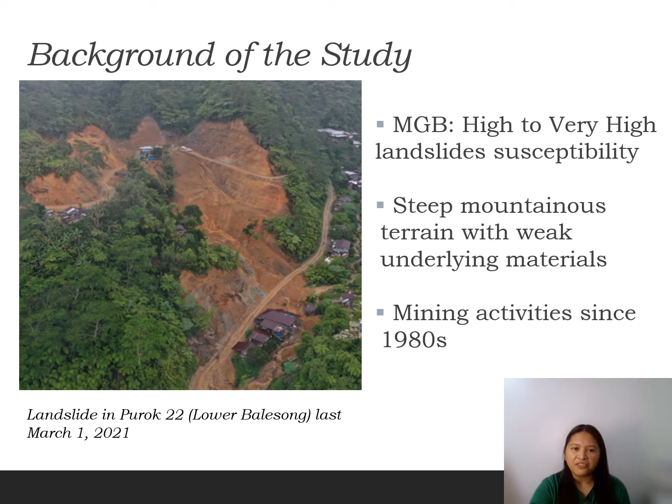Landslides had been a perennial problem in the area, especially during the rainy months of November to March. And of course, rampant mining activities certainly aggravated the situation. Since the early 1980s, people have flocked to the mountain for its high-grade gold ores.

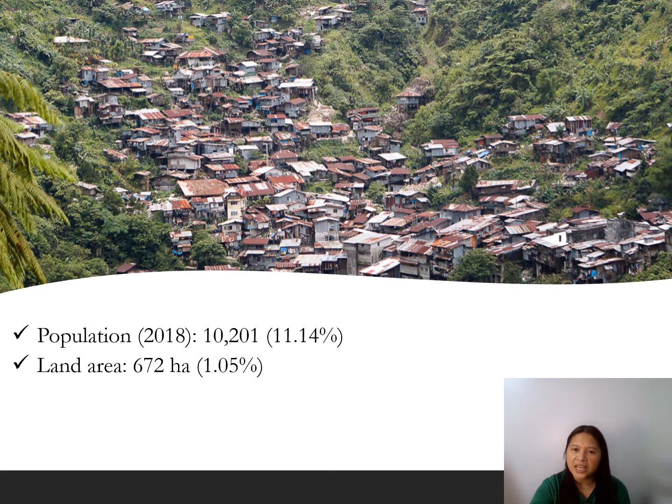Mount Diwata at present is home to approximately 10,000 miners and auxiliary workers and their dependents based on the 2018 census. However, it only covers 672 hectares, or a little over 1% of the total land area of the municipality. So this means that Barangay Mount Diwata has the greatest population density among the barangays of Monkayo.

In spite of the danger in the area, especially during the rainy season, people continue to live and thrive there because they are dependent on the ore-rich mountain for their livelihood. If the local government unit would strictly adhere to the hazard map provided by MGB, the whole area should be uninhabited. However, this would lead to displacement of people from their communities and consequently loss of their source of income. So this is the current dilemma of Mount Diwata.

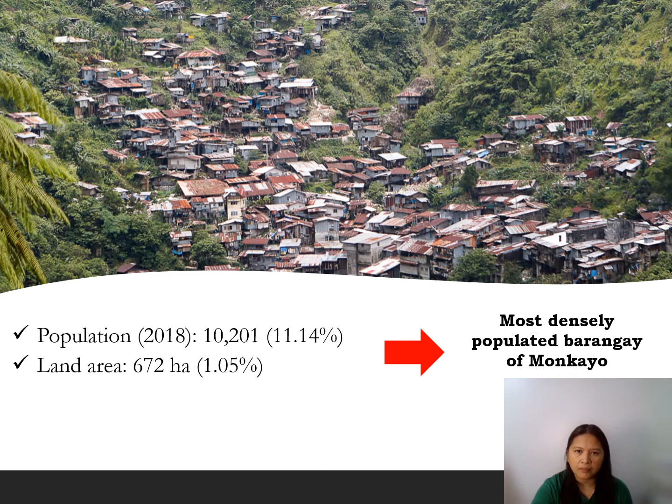Since it would be difficult to relocate people from the area, a better way of addressing the problem is to conduct a detailed geotechnical investigation to identify safe locations for settlements. The current hazard map from MGB has been based only on the geological parameters. Thus, the whole barangay had been identified to have very high or even critical susceptibility to landslides. However, a more detailed study on the soil properties and its strength parameters can delineate specific areas as safe and unsafe zones. So, the objectives of my study are as follows.

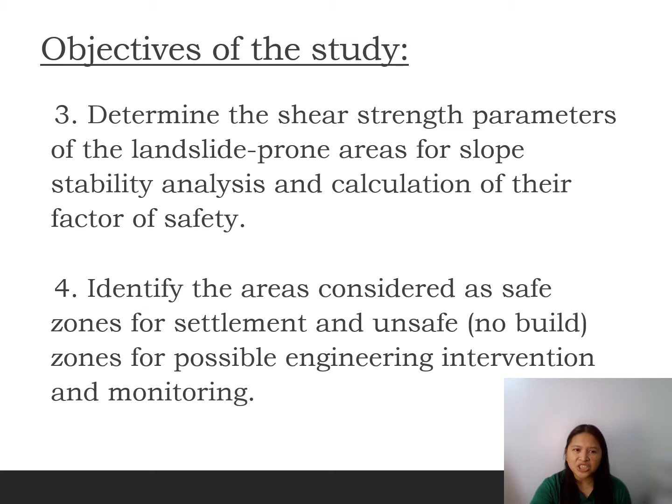First, investigate the physical and mechanical properties of the soil in the landslide-prone areas. Second, assess the geotechnical properties of the soil to evaluate their contribution to sliding. Third, determine the shear strength parameters of the landslide-prone areas for slope stability analysis and calculation of their factor of safety. And fourth, identify the areas considered as safe zones for settlement and unsafe or no-build zones for possible engineering intervention and monitoring.

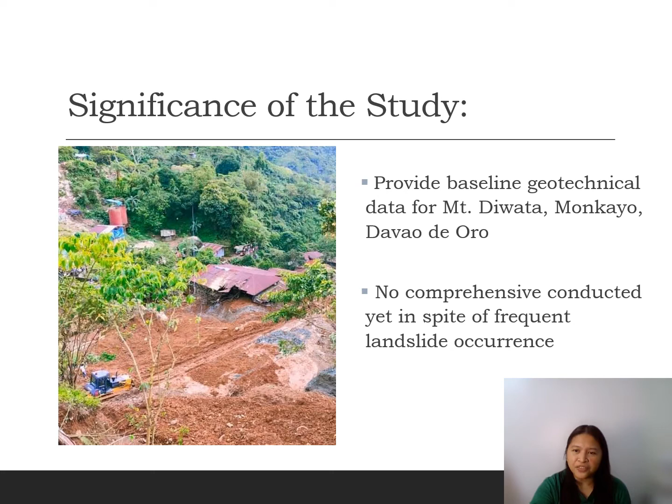Despite the millions of pesos wasted from property damages, plus the significant number of lives lost, there had been no comprehensive study conducted yet on the frequent landslide occurrences in Mount Diwata. The current study will therefore be the first geotechnical study in the area and will provide the baseline data for further studies. Note also that there had been no published information on the landslide hazards for the whole province of Davao de Oro, even though it had been identified as one of the provinces most susceptible to slope failures.

So this geotechnical study conducted for Mount Diwata can also be adapted to other landslide-prone areas in the province since these areas share the common characteristics of mountainous terrain with steep slopes, frequently experiencing heavy and prolonged rains, and the presence of mining activities.

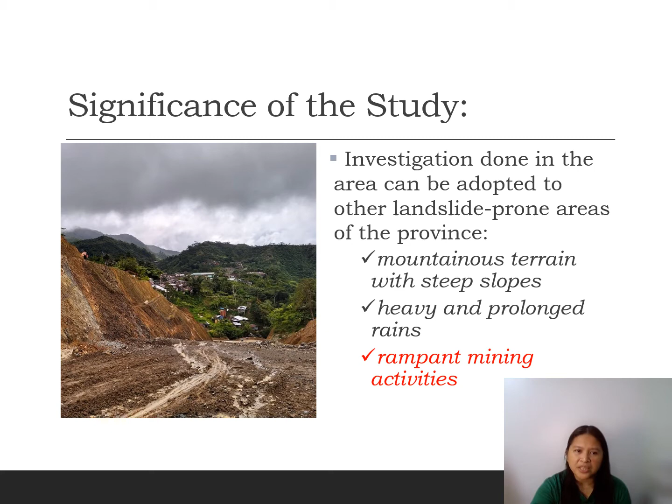So the mechanism of rainfall-triggered landslides often comprises a complex interaction between hydrological and geotechnical processes, which in turn depends on several factors like topography, hydrogeotechnical properties, and the initial state of the slope. The initial state of the slope is determined by its geometry and the initial water table. However, the actual failure conditions are heavily influenced by rainfall characteristics and the properties of the soil slope.

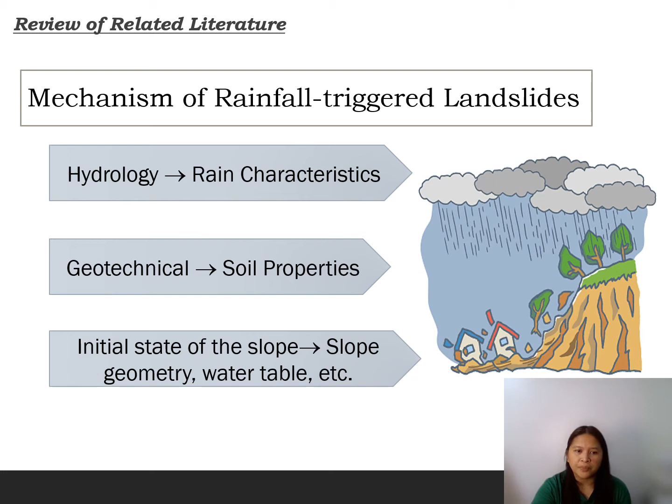Infiltration is a major factor in the instability of slopes during rainy weather. Rainfall infiltration can reduce matric suction, or the tenacity of the soil matrix to hold on to water. So this results in the reduction of the unsaturated soil shear strength along the potential failure surface. When the shear strength is no longer sufficient to maintain the stability of the slope, failure occurs. Pore water pressure and water content in a loose soil slope change rapidly. So water infiltration into cracks in the slope has a great impact on landslide development.

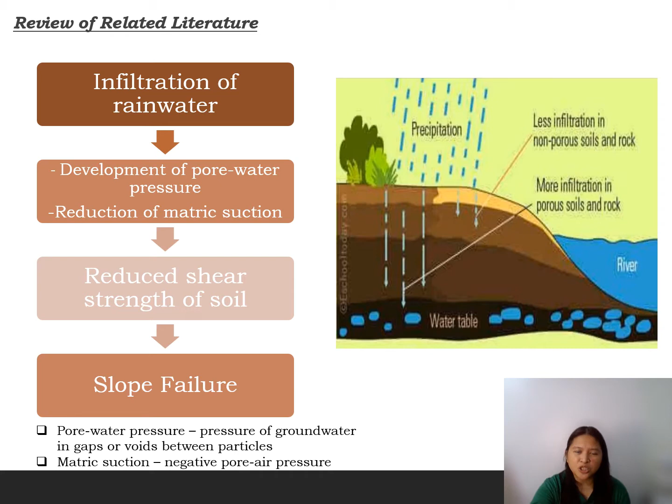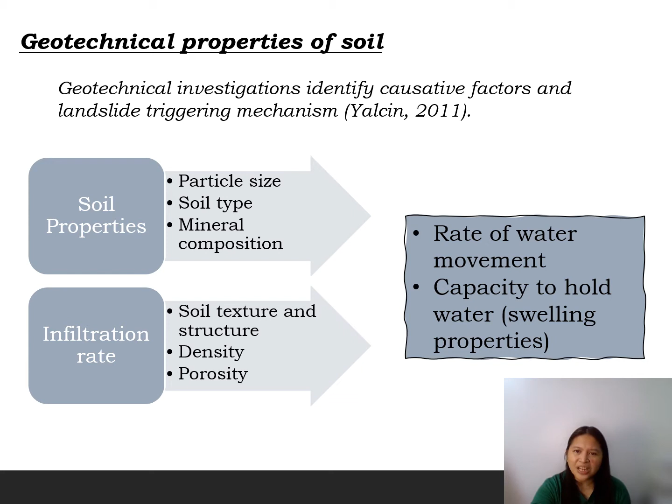Geotechnical investigations are carried out to identify the causative factors and landslide triggering mechanism. Soil properties such as particle size and pore distribution of the soil matrix can influence slope stability. These properties influence the rate of water movement and the capacity of the soil to hold water. Soil texture, structure, particle density, bulk density, and porosity are the properties which correspond to infiltration rates. Highly plastic clays with high to very high swelling and shrinkage potential will always favor landslide occurrences. In the majority of the cases, the failure mechanism is closely related to the type of material in the slides.

The mechanism of loess landslide is associated to progressive weathering along the zones in these slopes, which causes dramatic decrease in strength. The reduction of shear strength is due to the leaching of readily soluble salts, destruction of cementation bonds, and distribution of particles. However, for rock-soil aggregate slope, the deformation and failure mechanism is a progressive process, and local landslides will occur step by step.

The increase in water content decreases its cohesion and friction angle, but this also increases the weight of the upper rock soil aggregate. So the combination of increasing stress and decreasing rock mass material mechanical parameters will result in the toppling failure.

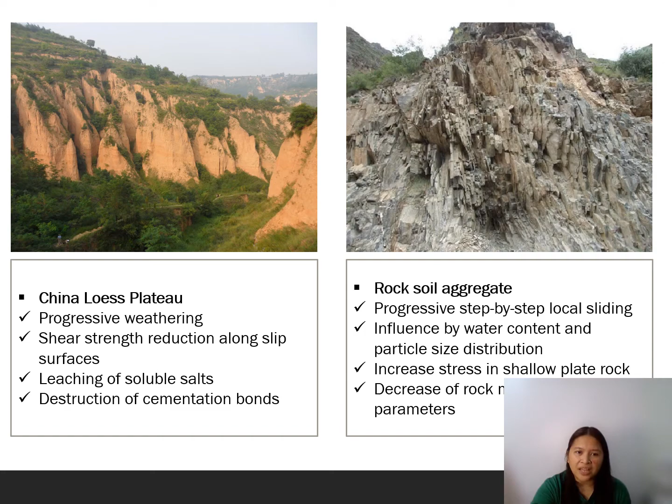Clay, on the other hand, has been characterized by its high swelling potential, sensitivity to humidity, and moisture that it becomes the potential slip zone in an outcrop causing landslide. The abundance of clays in a landslide body has a significant effect on the mechanical properties of the slip zone. The slip zone of a landslide is the natural shear zone resulting from different stress disseminated through different lithologies. Hence, the presence of clay in the hilly region is strongly attributed to landslides.

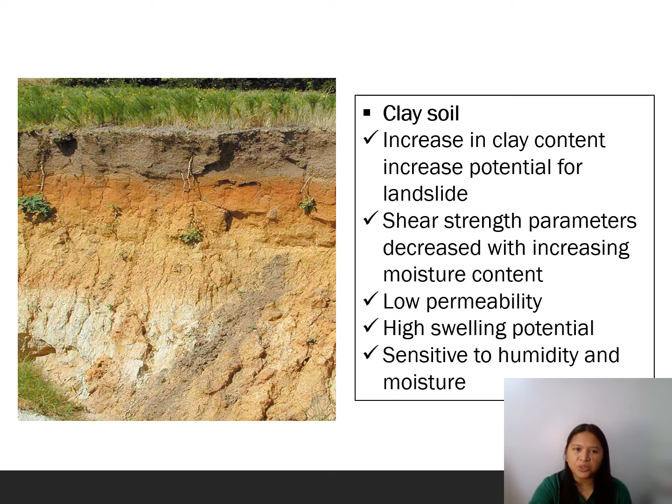For local studies, the failure mechanism of some of the biggest landslides were investigated. The Guinsaugon landslide in Leyte has been well studied as it is considered as one of the largest to have occurred in the recent years as well as the most devastating in terms of loss of life. According to Evans et al., the occurrence and behavior of the disastrous rock slide debris avalanche was determined by the intersection of geological, tectonic, climatic, and cultural factors.

It was initiated by the failure of a 450-meter high rock slope within the damaged zone of the Philippine Fault. The tectonic weakening of the failed rock mass had resulted from active strike-slip movements along the Philippine Fault. In addition, it was further enhanced by undrained loading of rice paddy fields on the valley floor beneath the debris sheet. No direct trigger was identified, but it did follow a period of very heavy rainfall with a lag time of 4 days, and 2 minor earthquakes also occurred on the day of the failure.

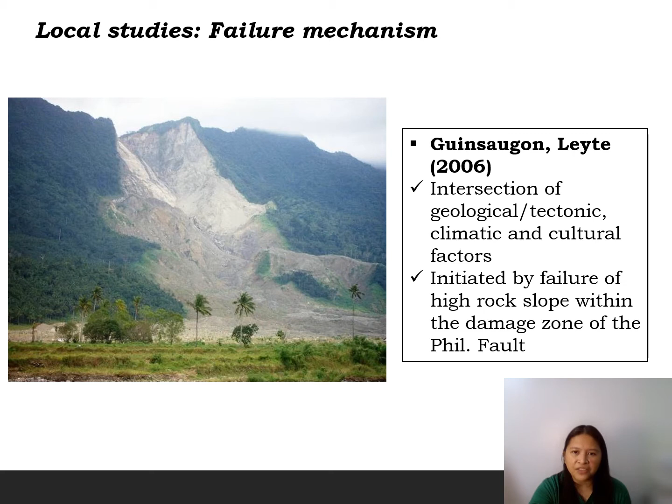For the study of Catane et al., the September 2018 Naga Cebu translational block slide occurred as multiple block detachments along a series of tension cracks that formed and grew progressively prior to the main failure. Preliminary slope stability analysis showed that the slopes were marginally unstable even in dry condition. Though the low angle profile of the slip surface favors stability, the low shear strength of the limestone bedrock and unsupported cut slopes may have contributed to the failure. There was no apparent direct trigger for the landslide, so this implies that a marginally stable slope can stand for several years before failure occurs.

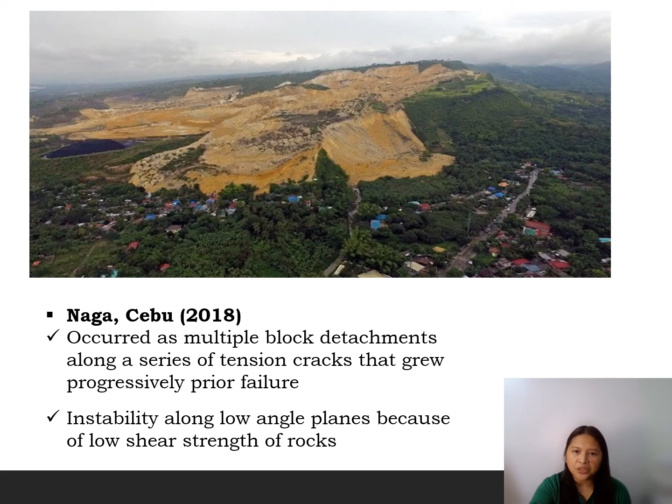Several landslide susceptibility maps on different locations were also made employing statistical analysis to determine the causative factors for the slope failure. Landslide inventories were performed using aerial photographs and satellite images. Dumlao and Victor, applying logistic regression within a GIS environment, showed that almost 40% of Antipolo City is potentially high risk in terms of landslide incidents.

The logistic regression model developed by Cruz et al. for Benguet identified aspect, elevation, and leaf area index as the causative factors which have statistical significance to landslide incidents. Their model also showed that 69% of Benguet is highly susceptible to landslides.

Opiso et al. also used GIS and frequency ratio to evaluate the causal factors of rainfall-induced landslides along the Cagayan de Oro, Bukidnon, Davao City route. Frequent landslides had hampered the flow of transportation in the area. The rainfall-induced landslide susceptibility index map generated showed rainfall coupled with soil type and slopes were the main triggering parameters.

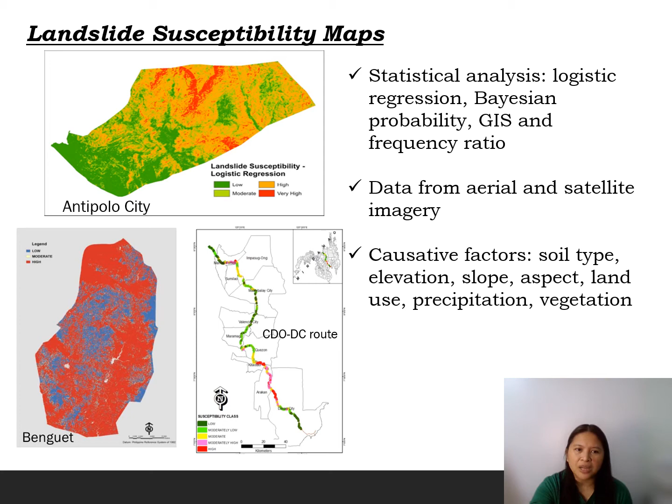The deterministic GIS model, called Stability Index Mapping or SINMAP, was used by Alejandrino et al. to generate a rainfall-induced shallow landslide hazard map for Davao Oriental. SINMAP used a digital terrain model to derive topographic, soil geotechnical, and hydrological parameters to compute for the factor of safety. The landslide susceptibility classification was translated to zoning maps indicating areas that are safe from shallow landslides, areas that can be built upon with slope intervention and monitoring, and the no-build areas.

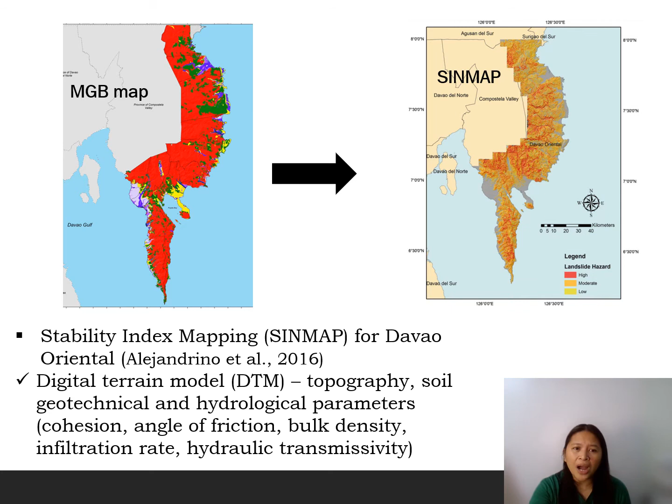So this study showed a great improvement from the MGB released hazard maps, which only utilize geological parameters and usually render all steep slopes of the mountainous area to have critical to high susceptibility to slope failures.

And finally, the intensive landslide assessment and susceptibility maps carried out for Kibawe, Bukidnon included an intensive field sampling utilizing around 20 boreholes. The result of the study revealed that the area has mostly inorganic but highly expansive fine-grained soil. It was also noted that the factor of safety has a considerable decrease when the slope condition changes from completely dry to fully saturated. The findings of the study provided a baseline reference for the area's slope stability that will be applied in land use planning and future development.

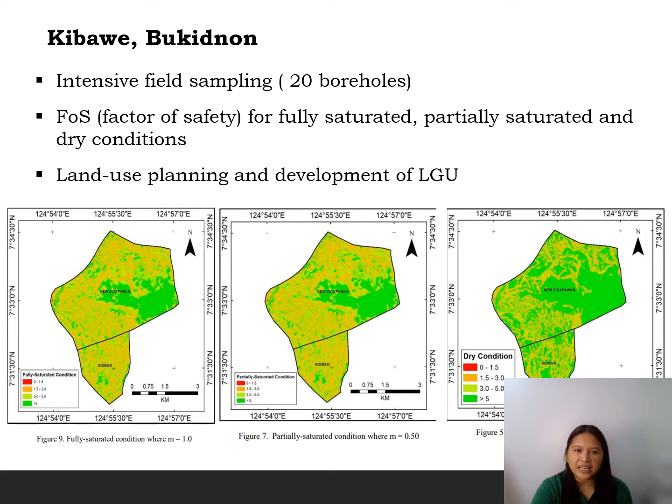Hence, it can be inferred from all this literature reviewed that slope movement occurs when forces acting downslope, mainly due to gravity, exceed the strength of the earth materials that compose the slope. So a landslide is mainly caused by factors that increase the effects of downslope forces and those that tend to reduce the strength parameters of the slope.

The oversteepening of the base of the slope due to natural erosion or excavation, or the increase in the weight of the slope itself because of water inflow or some load can increase these downslope forces or shear stresses. The reduction of the slope material shear strength, on the other hand, is primarily defined by its frictional and cohesive strength. Frictional strength is the resistance of the slope material's interacting constituent particles to movement, while the cohesive strength corresponds to the bonding between these particles.

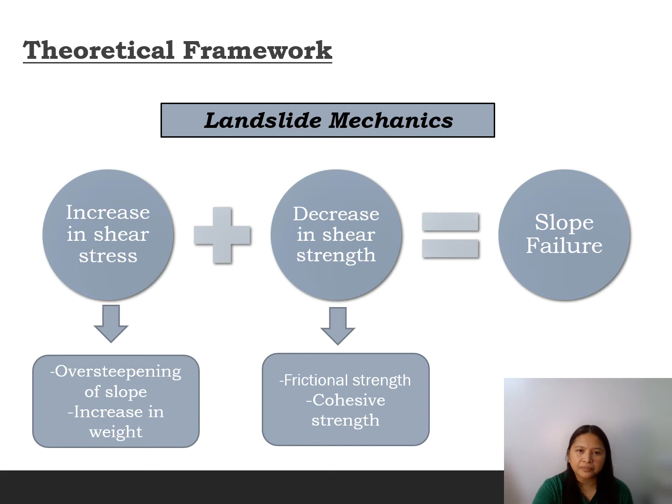In this study, the factors affecting rain-induced landslides will be primarily the soil properties and its strength parameters. The soil type will dictate their engineering behavior, especially in the presence of water. Hence, the knowledge of the soil type and particle size distribution of the failure material in a landslide is important for a better understanding of its failure mechanism.

The consistency of a fine-grained soil is also largely influenced by the water content of the soil. Gradual increase in water content of a fine-grained soil slurry causes the soil to pass from the liquid state to a plastic state, semi-solid state, and finally to the solid state. The water contents of these changes of state are different for different soils, and so the strength, consistency, and behavior of the soil are different for each state. Hence, another soil property that needs to be evaluated are the consistency limits or the Atterberg limits.

Soil permeability or porosity is also measured to assess drainage characteristics of soil. For the soil strength parameters, the angle of friction and cohesion will be determined to calculate for the slope stability in terms of the factor of safety.

The first step in the proposed methodology is the selection of the locations for the collection of soil samples. Locations for soil sampling are chosen based on previous landslide events provided by MGB reports, as well as the recent landslide hazard map of the area. However, reconnaissance site visit and consultation with the locals will still be conducted.

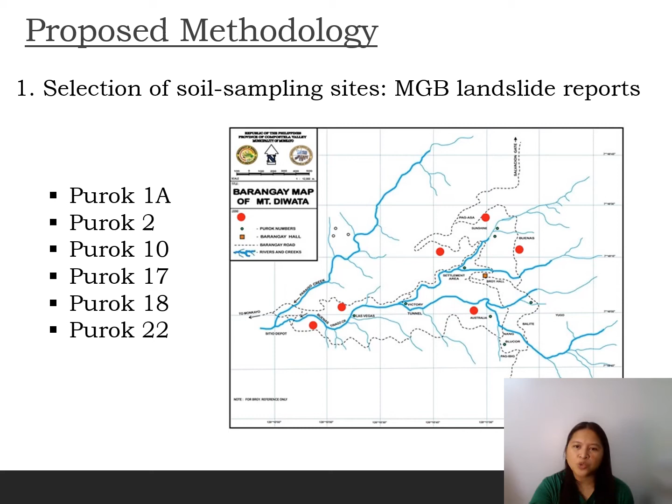Test pits are utilized for the collection of soil samples because aside from being the most economical and efficient, given the steep slopes in the area, they also allow a direct inspection of the soil strata. Disturbed samples will be taken from the moved mass as well as from the unmoved side scarp and head scarp zones. Undisturbed samples, on the other hand, will be taken only from the side and head scarps.

The sampling depths will range from 0.5 meters to 1 meter. These depths are representative of soils involved in the landslide since, according to the MGB reports, the mass movements are superficial and shallow slides. Intact or undisturbed samples will be taken by manually inserting a metal tube, called the Shelby tube, into the soil.

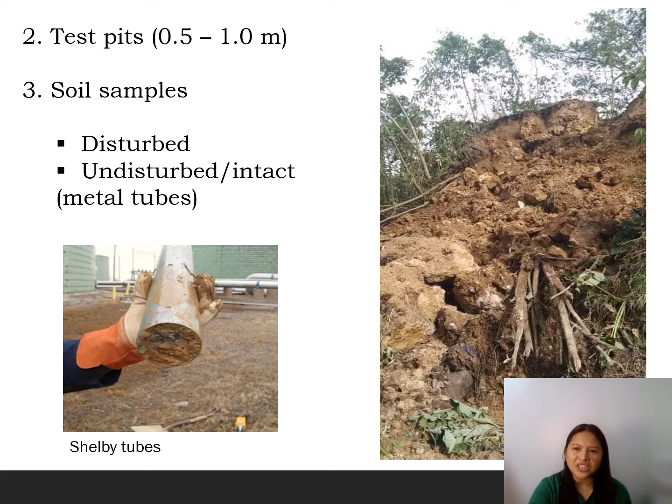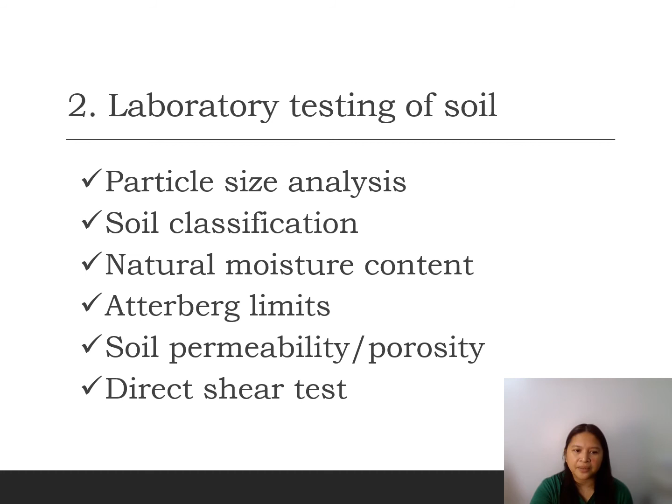The following laboratory tests will be conducted: particle size analysis, soil classification, natural moisture content, Atterberg limits, soil permeability or porosity, and direct shear test. The particle size analysis of soil covers the quantitative determination of the distribution of the particle sizes in soils. The distribution of particle sizes larger than 75 micrometers is determined by sieving, while the sedimentation process is used to determine the distribution of particle sizes smaller than 75 micrometers.

The experimental setup consists of sieves with varying mesh diameters, and these sieves will be arranged in descending sizes from top to bottom. A mass of dry soil sample is placed on the top sieve. The top sieve will be covered with a lid and a pan is placed at the base of the bottom sieve. This entire assembly is then shaken either manually or in a machine known as a sieve shaker.

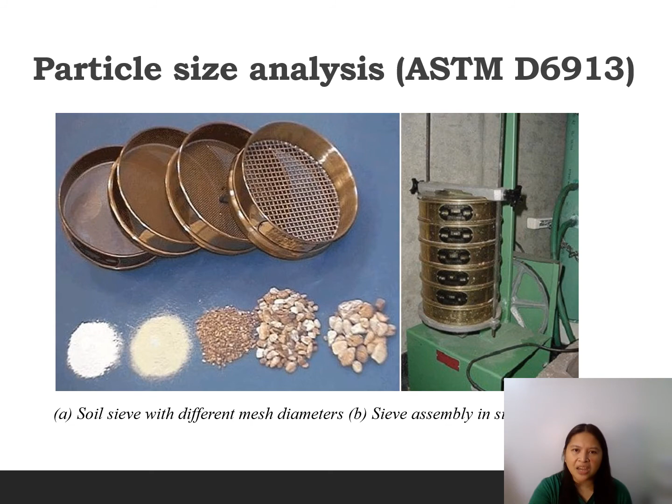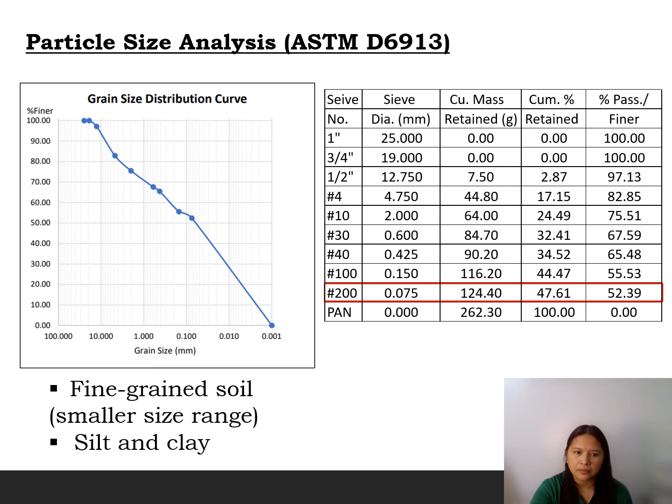Atterberg limits are the basic measure of the critical water contents of a fine-grained soil. Depending on its water content, a soil may appear in one of the four states: solid, semi-solid, plastic, and liquid. In each state, the consistency and behavior of a soil is different and consequently, so are its engineering properties. Thus, the boundary between each state can be defined based on a change in the soil's behavior.

The plasticity index is defined as the range of moisture content over which the soil deforms plastically. It is the difference between the liquid limit and the plastic limit. So the plasticity index is a measure of the plasticity of a soil, and it determines the amount and type of clay present in the soil. In general, soils with high plasticity index tend to be clay, and those with lower plasticity index tend to be silt. And those with a plasticity index near zero tend to have little or no silt or clay present.

In the study, the fall cone method is used to determine the Atterberg limits. The soil used in this test is that which passes the 425 micrometer, or number 40, sieve. In this test, the liquid limit is defined as the moisture content at which a standard cone with apex angle of 30 degrees and mass of 80 grams will penetrate a depth of 20 millimeters in 5 seconds when allowed to drop from a position of point contact with the soil surface.

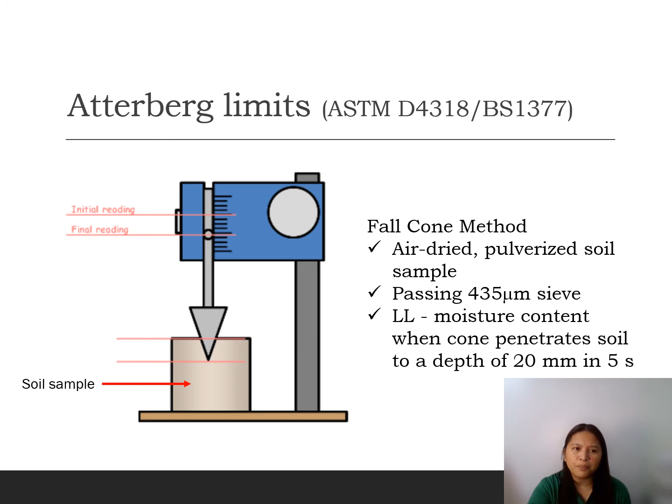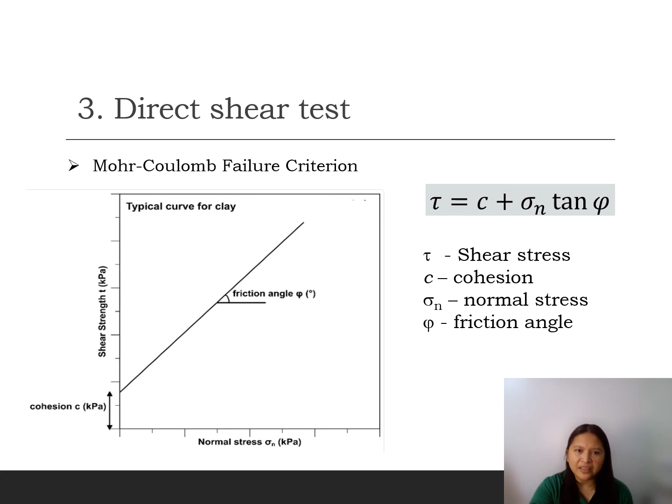Shear strength is defined as the maximum resistance that a material can withstand when subjected to shearing. In soil mechanics, the shear strength is evaluated using the Mohr-Coulomb failure criterion, and it assumes that the shear strength depends on 3 factors: the normal effective stress, the friction angle of the material, and the cohesion of the material. The direct shear test is considered one of the most common and simple tests to derive the strength of a soil and can be performed on undisturbed or remolded samples.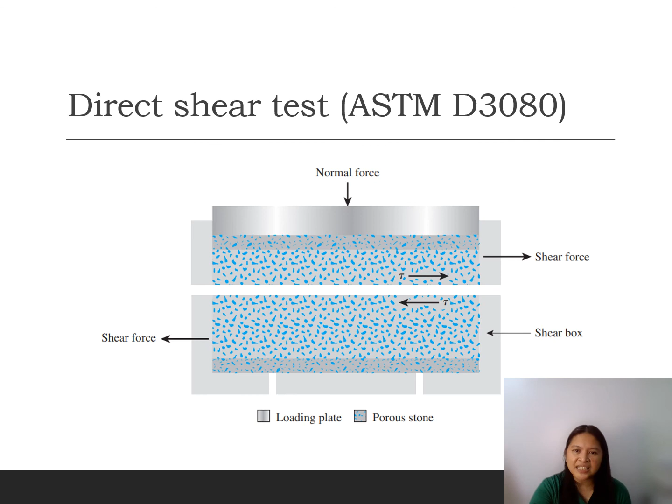The test equipment consists of a metal shear box in which the soil specimen is placed. The soil specimen may be square or circular. The box is split horizontally into halves. Normal force on the specimen is applied on the top of the shear box. Shear force is applied by moving one half of the box relative to the other to cause failure in the soil specimen. Depending on the equipment, the shear test can either be stress-controlled or strain-controlled.

The direct shear apparatus used in the study is strain-controlled. In a strain-controlled test, a constant rate of shear displacement is applied to one half of the box. The resisting force, the shear force of the soil, corresponding to any shear displacement, is measured. So the table and graph show the resulting shear force for any given horizontal displacement. Note that as the displacement is increased, as expected, the horizontal force also increases.

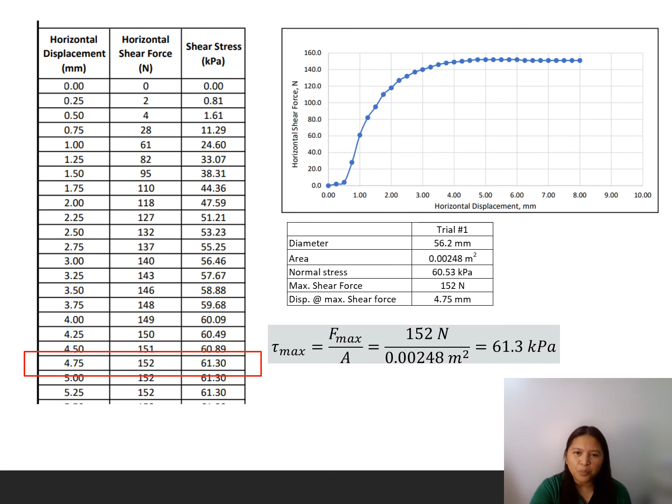But after a displacement of around 4.75 millimeters, the shear force is maintained at 152 newtons. So this corresponds to the maximum shear force, and we can now calculate the maximum shear stress as shown. So for this trial, we have a maximum stress of 61.3 kilopascals.

Three trials are made to allow us to plot the normal stress versus shear stress graph. From the graph, we can determine the cohesion and angle of friction following the Mohr-Coulomb failure criterion. These two soil strength parameters are important for soil stability analysis, in particular, the calculation of the factor of safety. The factor of safety allows us to evaluate whether a given slope is stable or unstable.

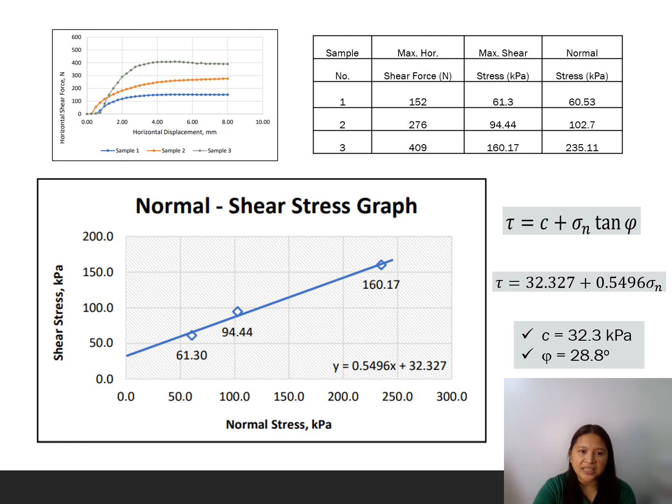So in conclusion, my proposed study will utilize the geotechnical properties of the soil samples from the landslide areas in Mount Diwata to evaluate the stability of these slopes and identify which particular properties contributed to these slope failures.